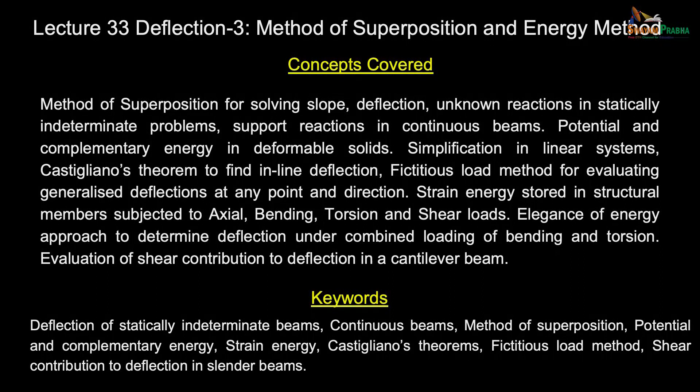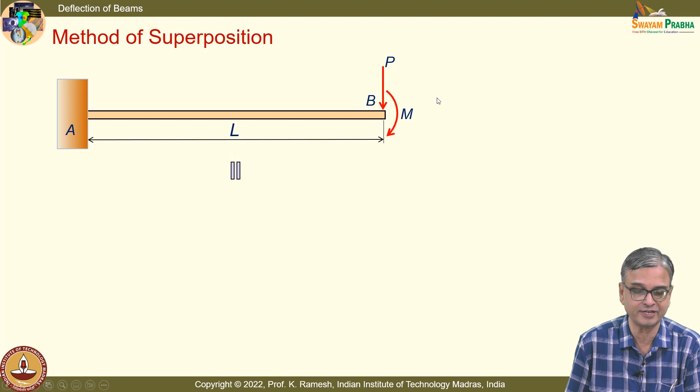Let us continue our discussion on deflection of beams. I will try to cover some problems from method of superposition followed by the energy method. My main focus will be on discussing how to approach the problem. The mathematical simplification, I leave it as an exercise that also helps you to ruminate over what is discussed in the class, and please do the mathematical simplification yourself. In the last class I asked you to do this as a homework, and you know how students operate, so it's better that I discuss it again.

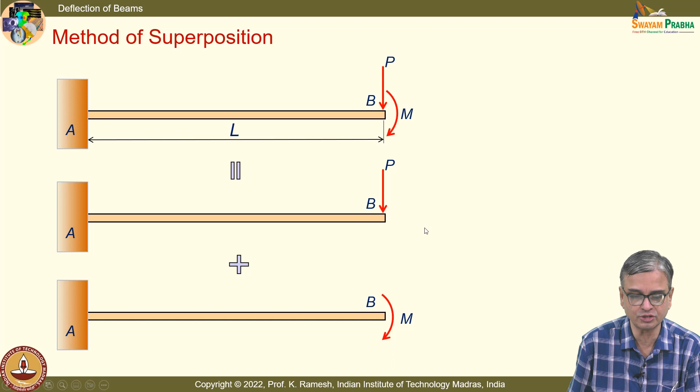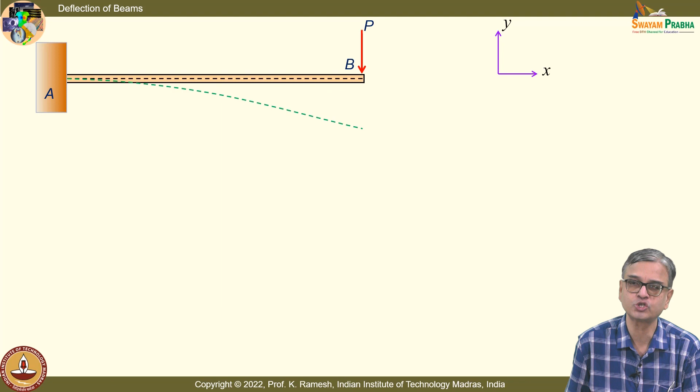We have done by moment area method what is the end deflection and also the slope at the load application point for both these cases, and these two loads are simultaneously applied to the beam, which you can think of as superposition of an end load and a bending moment. And this is a statically determinate problem. Fine. You have individual solutions available and you simply add those solutions, whether it is a displacement or a deflection or a slope. Our focus is to get

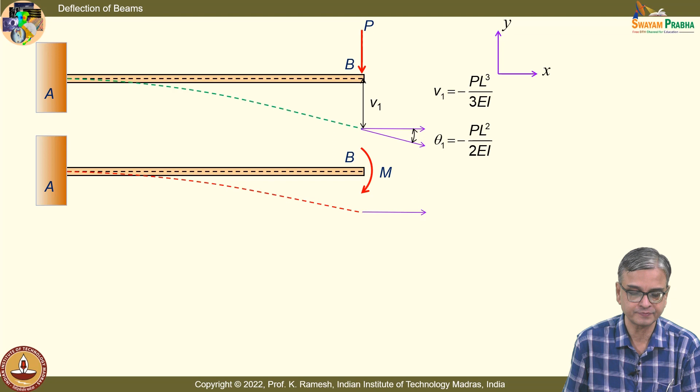what is the combined effect, and we have already derived what is V1. V1 is minus PL cubed by 3EI. I have said that PL cubed by 3EI is a very important result. We may be using it repeatedly. It is worth remembering that. And you have theta 1 as minus PL squared by 2EI. We have also seen for a bending moment what is the value of V2 and theta 2. So, when I have a combined loading, the principle of superposition says I can add them.

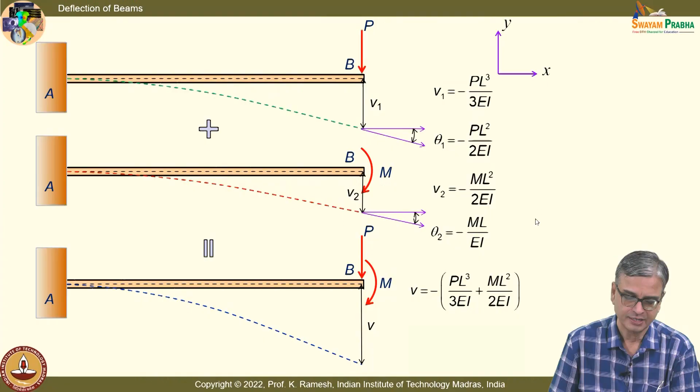For illustration purposes, these deformations or deflections are shown very large. In reality, they are very small and you can comfortably add them, so that I get what is the tip deflection and also the slope at the tip, simply the arithmetic addition of the values that we have got for individual problems. So, V becomes minus of PL cubed by 3EI plus ML squared by 2EI. See, the idea here is, I have also mentioned, assigning the sign to these quantities. You have a procedure where you plot the deflection and then label it. That is the best way to do it. If you do a double integration or integration 4 times, if you follow the sign convention, all the quantities are obtained with the desired sign. In none of the other methods you have that luxury. Okay. Here I have shown this as minus, but you may not get it from the mathematics as such.

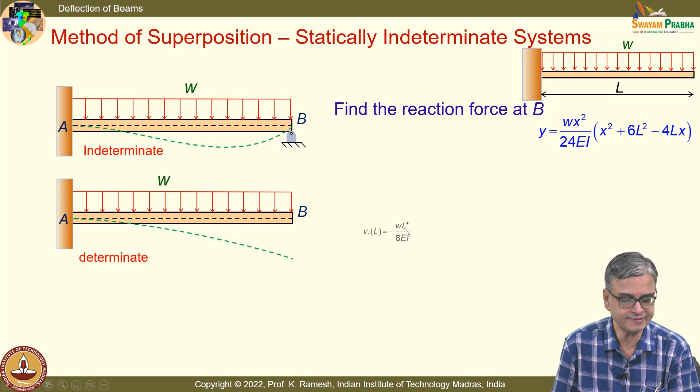People have used y as a symbol or v as a symbol, and instead of phi they use theta, instead of rho they use capital R. So, all of these symbols are seen in the books. So, you should be comfortable by looking at them repeatedly, and you can also sketch what is the deflected pattern when I have a uniformly distributed load. And I can have the second problem. So, from this it is possible for me to find out the deflection. I call this as V1, I get this as minus WL power 4 by 8EI. And here I remove that distributed load, I replace this as a reaction RB, fine. And you know this is nothing but a cantilever, and with this load, what way you anticipate the deflected shape? The deflected shape will be like this. This you should be very comfortable to visualize. Visualization is very important.

So, when I calculate the deflection, I should put the appropriate sign and get the net, fine. But here the question is to find out the reaction RB. So, when I have the reaction RB, I anticipate that there is 0 deflection at this point in the actual beam. So, I equate these two deflections by magnitude, and I can easily calculate the value of the force RB, which you could not have calculated in your rigid body mechanics. Even though it is a statically indeterminate problem, method of superposition helps you to do that.

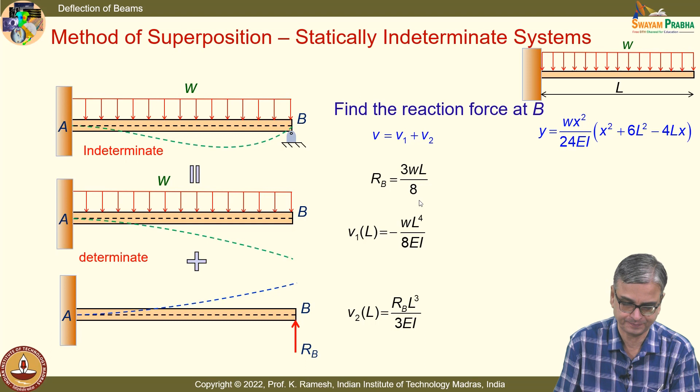I hope I have the value of RB. Yeah, it is V1 plus V2 should go to 0. So, I get RB as 3 WL by 8. So, a very useful application of method of superposition. Then we move on to another problem.

You know, what is this problem? Can you solve it by rigid body mechanics? Is it statically determinate or indeterminate? First, you should recognize that when a problem is posed to you, you should recognize whether it is statically determinate or indeterminate. If I do not have a spring, it is statically determinate. If I have a spring, it is statically indeterminate. It is not possible for you to solve using the principle of statics.

But you know, a spring will deform. So, you can split this as sub problems and also visualize the deformation picture. So, one problem is just look at the end load, other problem is just look at the spring attached. Spring is going to produce a normal force. The question here is, how do you visualize the deflection there? I have said that these 2 points are important. So, I have labeled this as y1 and this as y2.

And I have the second problem where I replace the spring by a force. And which way should I put the force? All that you should apply your mind. Blindly you should not do, you should understand the physics of the problem. When I put the tip load, when the beam is pushed downwards, the spring will try to pull it up. If you do not look at these issues and do not put the problems properly, then you are solving a different problem. So, you should apply your sense of visualization. So, I will put the reaction like this. Can you attempt to draw the deflected pattern for this?

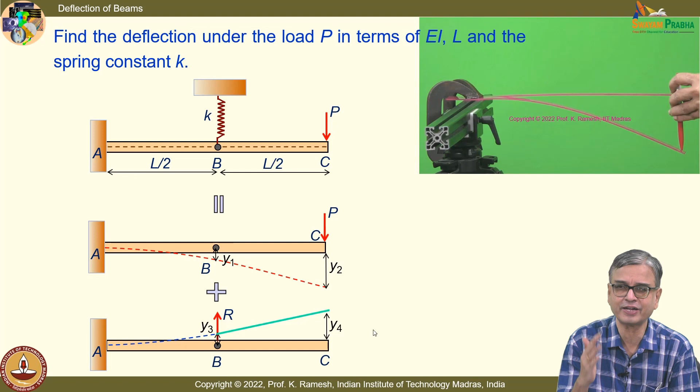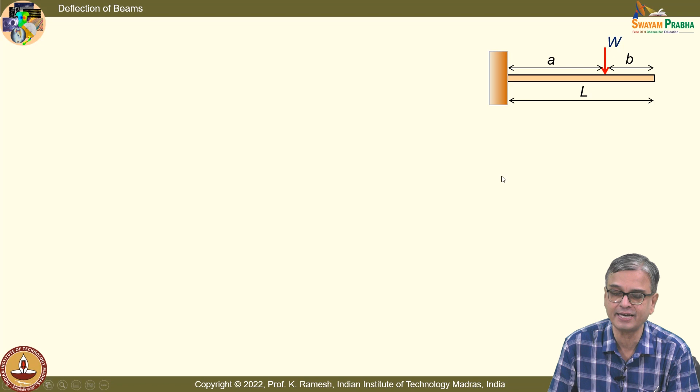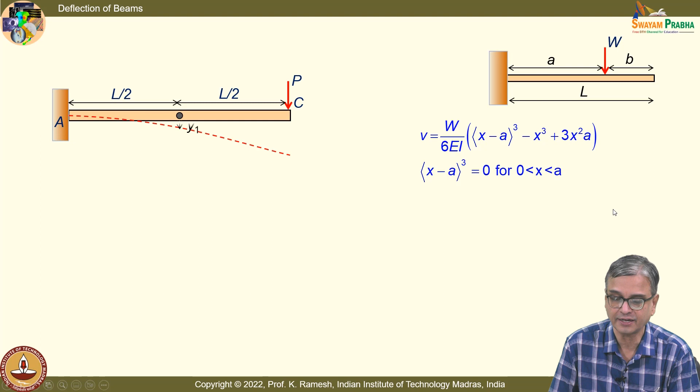And the first issue is, what is the solution that I should look from the table. You have a generic solution available for the cantilever with a tip load, not a tip load, but it is at a distance b from the tip. You have the expression for V, you also have the expression for the theta. I have that, probably it is not coming up. Okay.

I have this as the problem. I have to find out what is y2. Can you tell me what is y2? You do not have to even look up that expression. What is the value of y2? I have a cantilever with a tip load P, that is all. Fine. So, it is a very useful result, PL cubed by 3EI is a very useful result. I have not even put the symbol, sign here. The idea here is, you will have this, and in the diagram it is put where is y2. When I have y2 listed in the diagram, if I give the magnitude, that is also sufficient. I should not make a mix up in my mathematics. Okay.

And at x equal to L by 2, you can substitute here and you can find out what is the value of y1. When I simplify, I will get this. I get this y1 as 5 PL³ by 48 EI.

So, the first exercise is you should look at the table which gives you the generic solution, which one you need to use for this given problem, and learn how to interpret what is stated in the expression, because it says how to handle this bracket. Okay. That is all very simple, you should be alert, that is all.

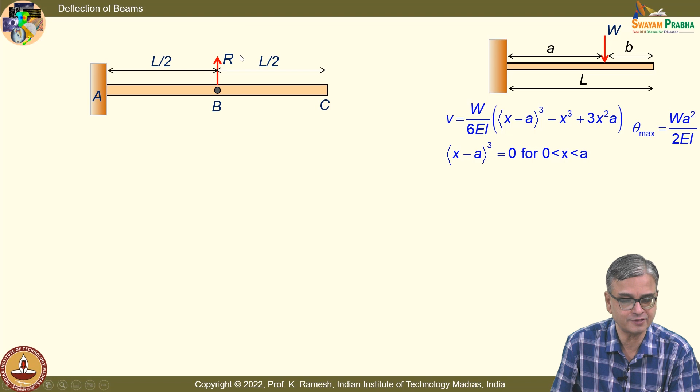So, I have calculated y1 and y2 in a very simplistic manner, and I also need the value of theta, at least the next step we need this, that is given as W a squared by 2 EI. So, you should know how to use this information, that we will see for the spring force. There is a spring force which is acting here, and can you tell me what is the deflection here, y3?

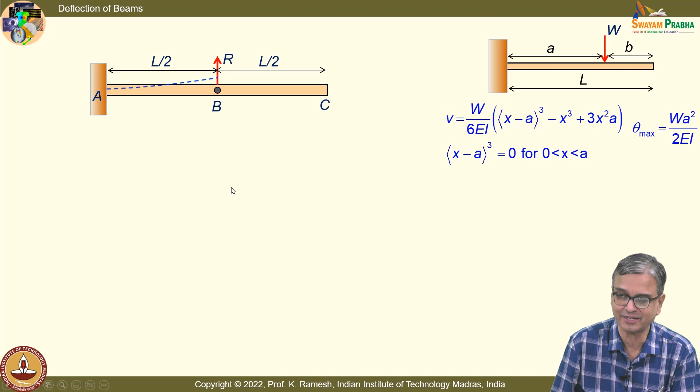You do not have to see anything, RL³ by 3 EI, with RL by 2 cube, okay, that is what you have to do. Yeah, the length is L by 2. So, you have to do RL by 2 whole cube by 3 EI. Certain things, you have to pick up speed. If you are expected to solve as many problems as possible before you come for the examination, you have to remember PL³ by 3 EI, that is a very useful result.

So, I have RL³ by 24 EI, and how do I find out the deflection at C? You need the slope here, and you also need to know the length. Okay. So, this will be addition of y3 plus something. So, I have theta 3 given from this expression W a squared by 2 EI. A here is L by 2. So, R L by 2 whole squared by 2 EI. So, you should know how to handle these equations. So, very simple. It is only high school knowledge that is required, but you have to be alert and careful.

And you have this as a straight line. It is emphasized in the diagram also. So, I have y4 as y3 plus theta 3 into L by 2. See, the theta 3 into L by 2, we are doing it because we are handling very small deformation. That aspect you should remember. So, I get this as RL cube by 24 EI plus R into L by 2 whole squared by 2 EI multiplied by L by 2. So, I get this as 5 R L cube by 48 EI.

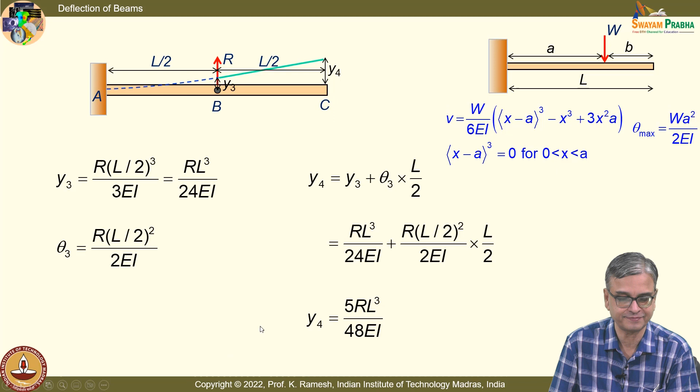Once I determine these deflections, finding out the spring force is doable, and also the end deflection. So, that is what I am going to summarize here. This is looked upon as summation of two problems, one with the end load, another with the spring force. I cautioned that when you look at the spring force, you should put the spring force in the right direction. If you do not put it in the right direction, you are solving a different problem. So, you should physically respond to what is given in the problem statement. So, y3 and y4 are available now. y3 is RL cube by 24 EI, y4 is 5 RL cube by 48 EI.

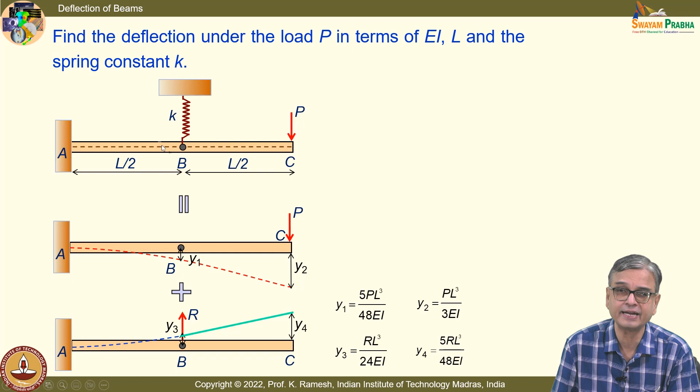And how do I get the spring force? I know y1 and y3. So, your spring force is nothing but k times y1 minus y3. You can do the simplification, and when you do this, the spring force comes to be 5 P by 2 multiplied by 1 plus 24 EI by KL cube. You may also verify my simplification. If there are any typographical errors, please alert me.

And you can also get the deflection at the end. What is the deflection at the end? y2 minus y4. That is all, as simple as that, y2 minus y4. So, you can draw the deflected shape, assign the sign at the end. That is physically appreciating the problem and getting the magnitudes. That is a better way to handle the method of superposition.

And this turns out to be, please verify my simplification, PL cube by 3 EI multiplied by 1 minus 25 divided by 32 multiplied by 24 EI by KL cube plus 1. Okay. So, I expect you to do the arithmetic simplifications. Then we move on to another problem.

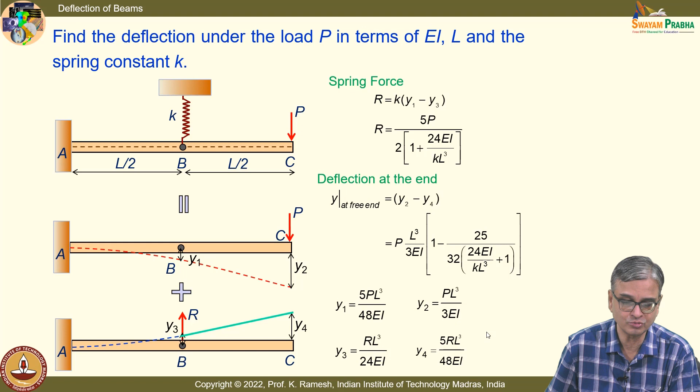What is this beam? I have a support here, here, and here. It is continuously supported, and it is statically indeterminate. I have written it in the title itself, but you should be able to recognize that this is statically indeterminate. And the question is, find the reaction forces at B and C.

And here I said that you should be trained on visualizing the anticipated deflected shape. You know the supports, and I have a distributed load. What do you anticipate as the deflected shape here that you can draw? What is the anticipated shape? It will come down, isn't it? I can draw that.

The idea to remember is, here you will have a slope, because this is not a fixed end. How do you represent a fixed end? The slope has to be 0, and the deflection also has to be 0. So, I can sketch the portion here. Join these two intelligently. Is the idea clear?

See, the main purpose of getting into the principle of superposition is to train you to visualize what happens to the beam even before you start solving it. If you have that anticipation, you can also verify whether you have made any mistakes in your mathematical development. So, the possible deflected shape is this.

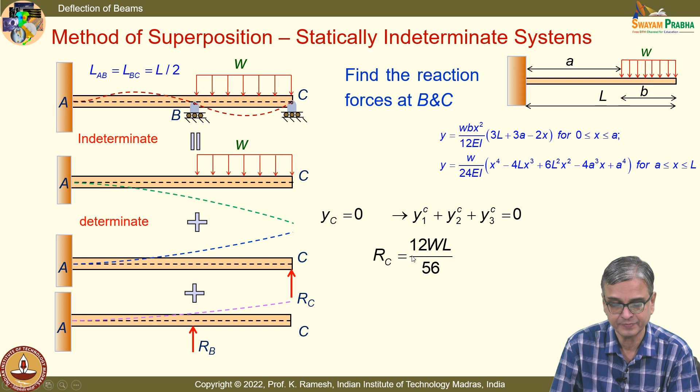So, you know how to get the deflected shapes and also the value of deflection. So, I have y1c plus y2c plus y3c should be 0. That is what happens here. That will help me get RC. I would expect you to simplify and solve it yourself and get RC as 12 WL by 56. Please correct any errors. And YB is 0, that is Y1B plus Y2B plus Y3B. So, RB is 19 WL by 56.

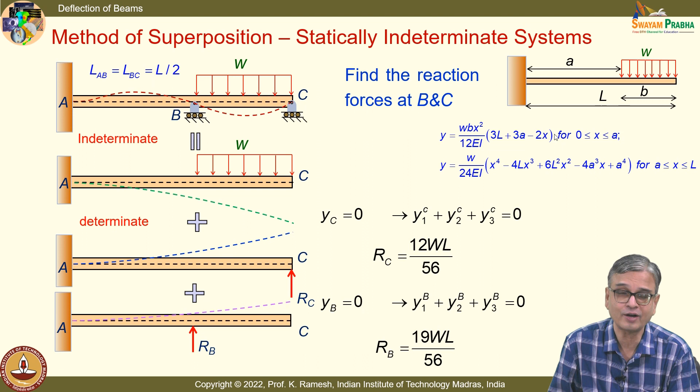So, you have to recognize how many sub-problems you should have for a given loading, and recognize whether it is statically determinate or indeterminate for your understanding, because when you split this, they are all statically determinate problems, and you have from the table what solution you have to call out. That also requires training, and to interpret this, you should see what the definitions given are. So, handle that very carefully. Fine.

One of the most useful methods in engineering science development is handling energies. The moment you come to deformable solids, we say the specimen is going to deform, that means it has the capacity to store energy. And to make our life simple, we say it is a reversible process, it gives out the energy. There are no frictional losses. Even though frictional losses happen in actual systems, you may try to minimize them, and your mathematics becomes much simpler if these are reversible processes.

And for illustration, you take a spring, but you know very well, when I pull a spring, it has a very complex response. We will also solve this problem later, but here what is looked at is an engineering material which deforms similar to a spring. So, I have an axial rod which is pulled out, imagine it like this. And to make our life simple, because we want to develop an equation in a manner that if I differentiate the energy with respect to the force, I get the deflection. That is what we are going to prove.

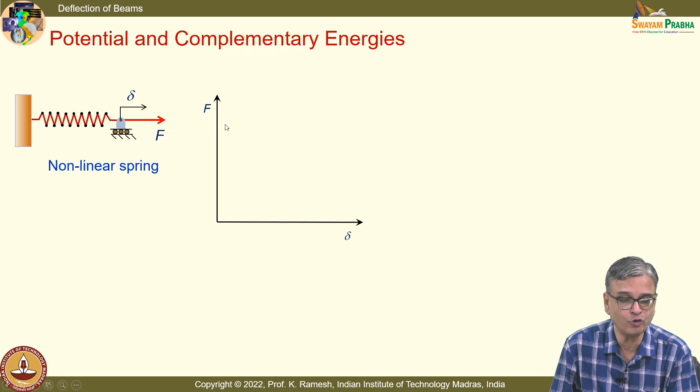We may live on linear systems, but to illustrate the important difference, why I have to work on what is known as complementary energy, we start with a nonlinear spring. What is the implication of a nonlinear spring? When I draw the force deflection relation, it is not going to be a straight line, it will be of some curve. I have the curve like this, it is a nonlinear spring.

And what is the energy stored? In all these problems we have discussed so far, whenever we show a load P, the load P was applied gradually from 0 to P. It is not that you have an impact load of P. We implicitly understood that these loads are gradually applied, and the deflection is seen as the load is increased.

So, the area under the curve is going to give you the energy stored. So, you have the potential energy, I have d delta. I can write this as energy, given the symbol capital U. Do not mix it up with small u. Small u is used for displacement, capital U is used for energy. I have this integrated from 0 to delta, f d delta. That is what you will write here, is it not?

When I do this, I show it pictorially that we are calculating the area under the curve. If I know the force deflection relation, I can evaluate this quantity numerically. But this is not convenient for me to get the deflection. Now, I look not at this energy, but at the energy in this zone, which is labeled as a complementary potential energy, because the spring is non-linear, you will have some other quantity as complementary energy. Is the idea clear?

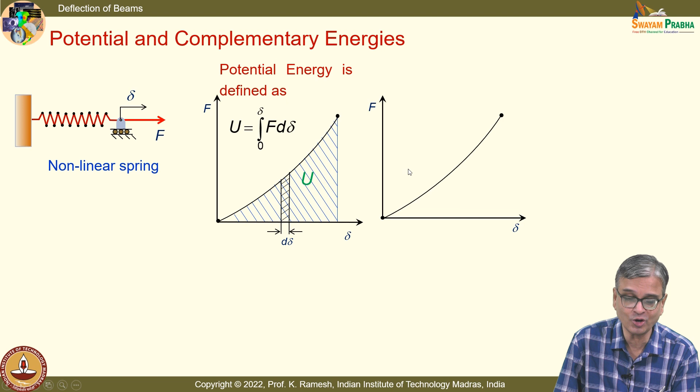The area under this curve and the area under this curve will be distinctly different. They are not the same. Here I have taken a small element and I have written the integral f d delta. If I do the same thing here, what do you anticipate? df will come. That is what we are interested in. When the point of application of a variable force F undergoes a displacement delta, complementary energy, which is always labeled as U star, capital U star, is defined as the integral of delta into df, for the entire load application. If I show this pictorially, I have this as the area, and these two are different.

The complementary potential energy area is different, but this is very nice for me to use. Suppose I differentiate this expression, I differentiate dU star by dF, I will get the deflection. In this chapter, we are finding out the deflection. If I calculate the energy stored in the body and differentiate, when I have a nonlinear system, I should find out the complementary energy. Can you quickly see what is the simplification in linear systems? Think about it, I am going to discuss it. So, this is the complementary energy, and you know for sure U will have some magnitude, U star will have some other magnitude as long as the system is non-linear.

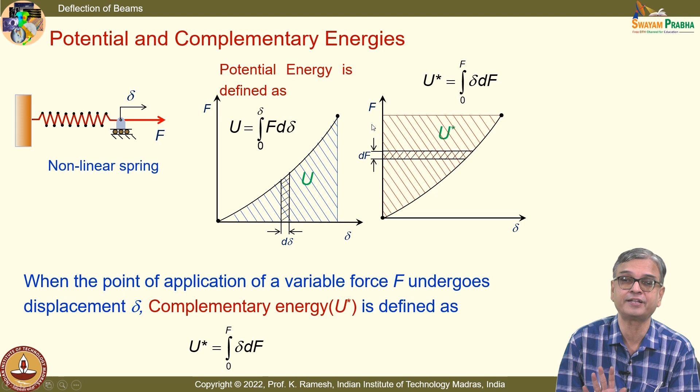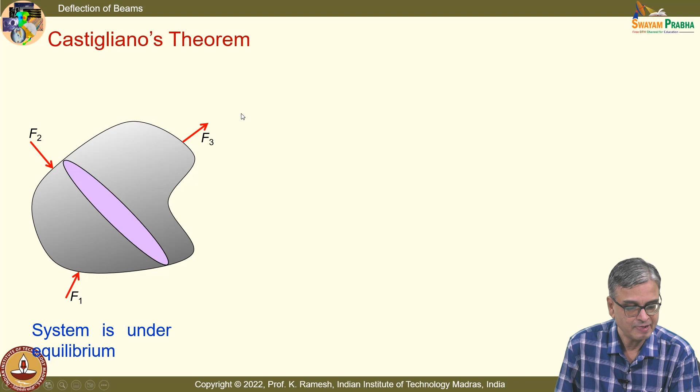Suppose the system is linear, what way will it happen? So, you have Castigliano's theorem. What does the theorem say? For a small increment in the load delta Fi, this is again a very important statement, if the inline displacement, it is also called the work absorbing component, is delta i, then one has

You have to understand, when I have a body like this, it will deform at the point of load application, it can move in a generic path. Which is the one which causes the work or the energy to be stored? Only the work absorbing component, that is the component of displacement in the direction of the force. This is a very important statement on inline displacement. I have the force F3 and it has a deflection in this fashion. This deflection can be resolved into one along the force F3 and one perpendicular to that. What you have as a displacement here is called the inline displacement, labeled as delta i, and this will be labeled as Fi. Only this contributes to energy storage or work done.

And what does this theorem say? This theorem says delta i multiplied by delta Fi equals delta U star, and you can also write this as delta U star divided by delta Fi equals delta i. In the limit delta Fi tends to 0, I can write this as partial U star by partial Fi, and you get the displacement delta i. It is a very powerful theorem which we would keep using even in your higher studies.

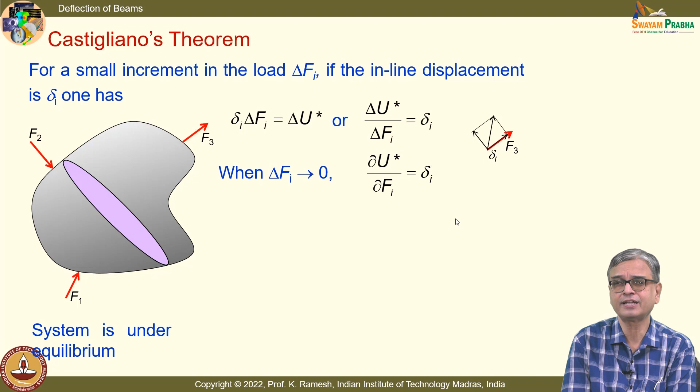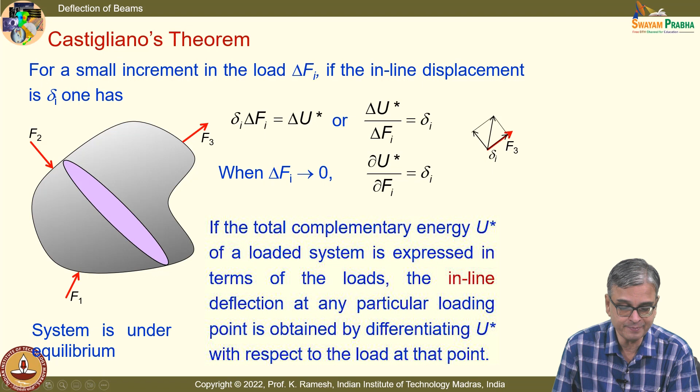If the total complementary energy U star of a loaded system is expressed in terms of the loads, that is the key point. I should express my energy stored in the system as an expression of loads. The inline deflection at any particular loading point is obtained by differentiating U star with respect to the load at that point. So, I have to essentially get a mathematical expression, differentiate it, then substitute the values. That is how you have to solve the problem. When you have the energy method, even if it is given as numbers, you must convert that into symbols, so that you are in a position to differentiate it, and finally put in the numbers. So, what happens in a linear system?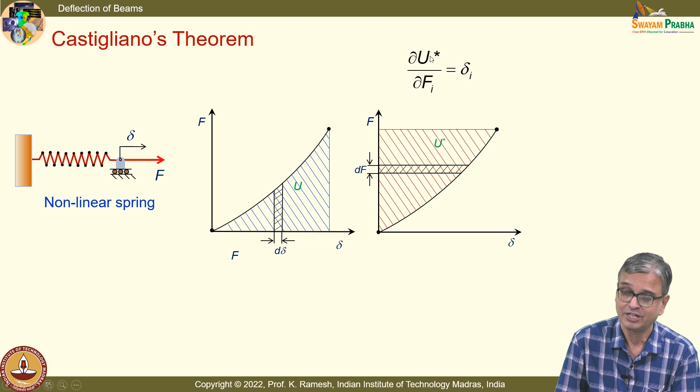Castigliano's theorem, we have developed it deliberately for a nonlinear system. To drive home the point, we need to work with complementary energy. You should never forget that. When I take a linear system, I have a line like this, so automatically these will be of equal areas. So, I have U star equal to delta into dF, that is also equal to F d delta.

So, I can calculate the expression in a very comfortable manner, and for a linear system, what you have as dou U star by dou Fi equal to delta i simply reduces to dou U by dou Fi equal to delta i. It is a very powerful theorem. It looks very simple. It takes a very small time to develop, but its utility is very significant. Very complex problems you can solve.

I have said in our development of moment curvature relation, we ignored the effect of shear, isn't it? And I said that I am going to tell you a method by which you will be able to find out what is the shear contribution to the deflection. We will solve that as a problem. So, many of those seemingly complex problems you can easily handle if you visualize it from the energy point of view, but the development is very simple. Now, what we need to understand is how to calculate the energy.

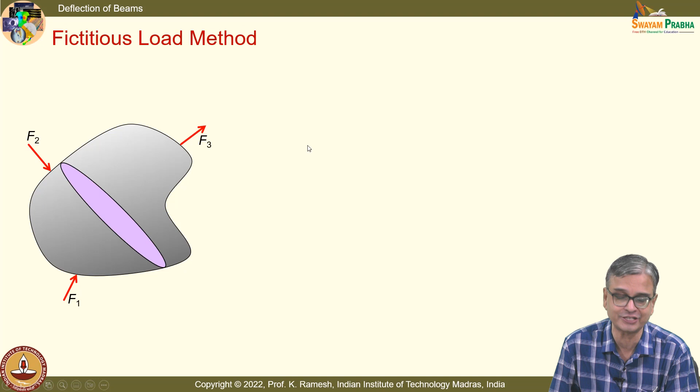But before that, you may not have the luxury that I want to find out the deflection at this point or some other point. I may not have a load there. One of the requirements of this is I should have a load acting at that point, and I should differentiate with respect to that, then I will get the inline displacement. The method itself says, fictitious load method. That means wherever you want to find out the deflection, you introduce a load. If a deflection delta is desired at a point where there is no load or in a direction which is not in line with the load, introduce a load Q and find out the energy because of that Q.

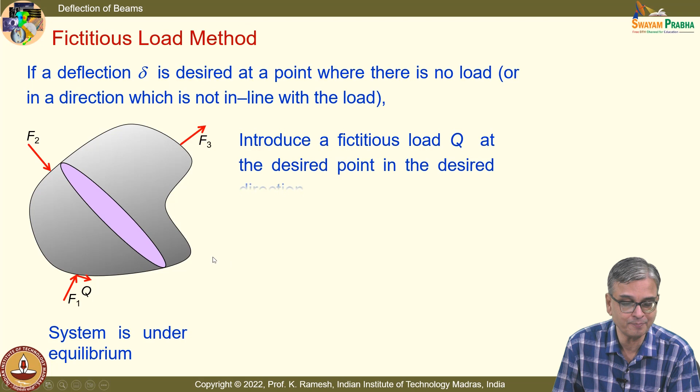It can be a point here, it can be that is not in line with this. I want to find out what is perpendicular to that. Or I can also have another point, introduce a fictitious load Q at the desired point in the desired direction. Express the elastic energy in terms of Fi and Q. Then you have dou U by dou Q. After you differentiate, you make Q equal to 0, you will get delta.

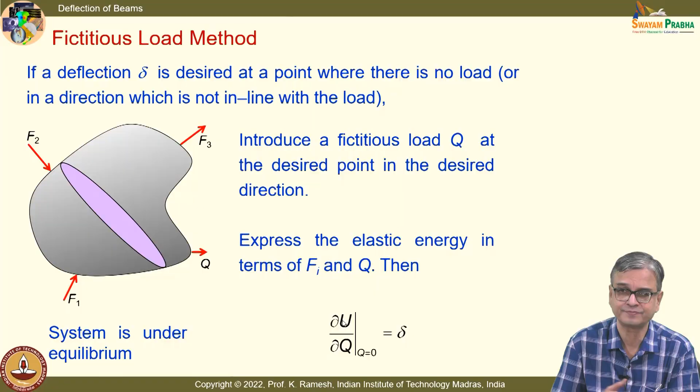This also we will solve. We will try to solve the problem, then you will understand. It is a very powerful technique. In a jiffy you can solve even complex problems. You don't have to do complex integration or anything like that. Very simply you can do that. So, now the focus is how to calculate the energies, strain energy. Okay, we will go and look at that.

Now, here again, though I have shown a spring, imagine that I have a rod made of aluminum or steel which is pulled out, and I have a gradual load application. When I have a gradual load application, it is a triangle. So, I have this as 1/2 of P into delta. Force into displacement is work done. Because the load is applied gradually, I have this as half. So, you should never forget that.

Long time back you have done virtual work, there the physics is different. Here I have this load applied gradually. I have the quantity 1/2 coming into the picture. So, similarly, I can develop the set of equations if I have an axial stress or if I have a shear stress, because we have already discussed what happens when a member is subjected to tension, torsion, or bending. You know what are the stresses developed. Once you know the area, I can convert the stress into force. So, what this expression says is force into displacement multiplied by 1/2. Same thing we will also do it here.

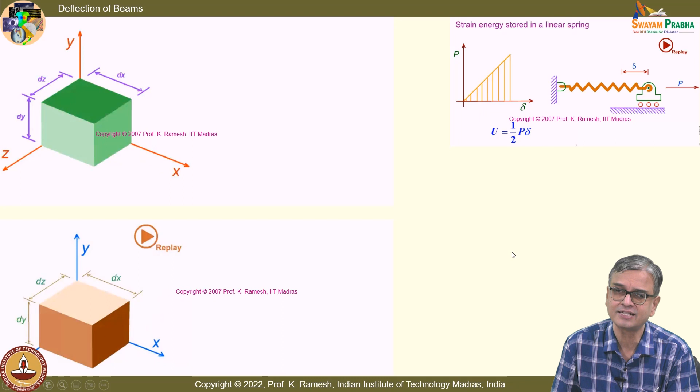So, we will do it for axial stress. I have this as epsilon x, and I have this as force, sigma x dy dz gives me the force, and epsilon x dx gives me the deflection, the elongation, inline displacement, with 1/2. So, when I do this, I get an expression 1/2 of sigma x epsilon x dV. If I go to torsion, find out what is the stress. For torsion, we have to go to shear stress, but if I go to bending, I know the expression for sigma x, I know the expression for epsilon x. So, I can calculate the energy stored because of a bending moment. Is the idea clear? So, now I go to shear stress. When I apply the shear stress, what happens?

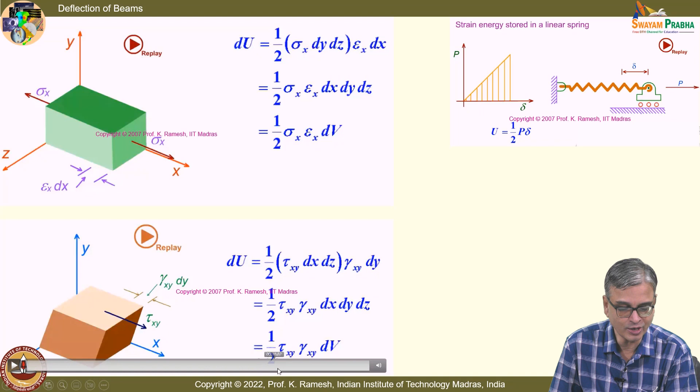Gamma xy is used. Gamma xy is the way the mathematics got developed. Only when the tensorial transformation came, people understood that you should always use 1/2 of gamma xy for transformation. But you write this like this. So, I have the force as tau xy dx dz and the inline displacement as gamma xy dy. So, I get this as 1/2 of tau xy gamma xy dv. So, these are very fundamental expressions.

Now, I will go and see what happens in an axial load, what happens in a torsional load, what happens in a bending load. I have this as P by A sigma x, epsilon x is P by AE. So, when I do this, I get this as 1/2 of P squared by AE into dx, because I can write the volume as dA into dx. So, I have the famous expression U equal to 1/2 of integral 0 to L. You are talking about a slender member, fine, P squared by AE into dx.

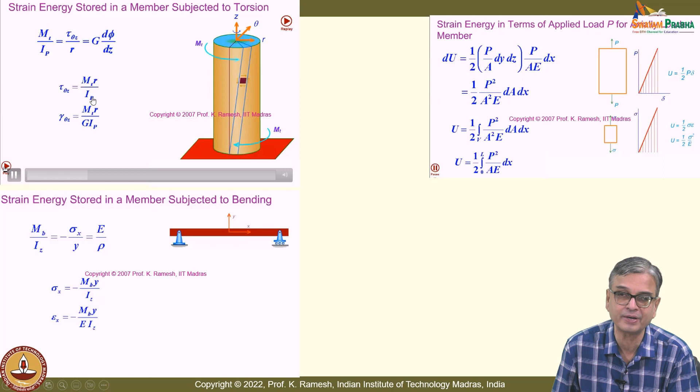Now, let us go to torsion. So, when I go to torsion, I have tau theta z as mT r by IP, gamma theta z is mT r by G IP. We have a recipe how to get the energy when I know the strains and stresses. So, I get the torsional energy as integral 0 to L mT squared by 2 G IP dz. See, look at the similarity between the two. It is very, very similar. The expressions are very similar. It is easy to derive and easy to remember also.

Can you anticipate what way you will get it for bending? It is very similar. It's coming cyclically. So, I have the sigma x and epsilon x, and when I say bending, we are talking about pure bending, away from the load application points. So, I have sigma x and epsilon x. So, I can find out the energy stored, and when you simplify, this also has an identical picture like this. I have this as integral 0 to L mb squared by 2 E IZZ into dx. All these three expressions are very similar.

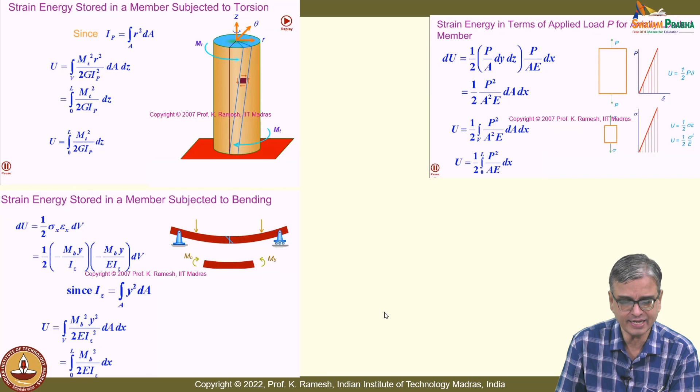You will appreciate the utility when you solve a practical problem. I have a problem where I have a member like this. It's like you are having a hand like this, somebody is putting a load. So you should visualize what happens to your shoulder. Fine. What happens in this section AB? Section AB is subject to what? Section BC is subject to what? Only torsion? AB is subjected to torsion as well as bending, and BC is subjected to only bending, and we ignore the shear deformation. We don't want to complicate now. I will solve shear deformation as a separate problem.

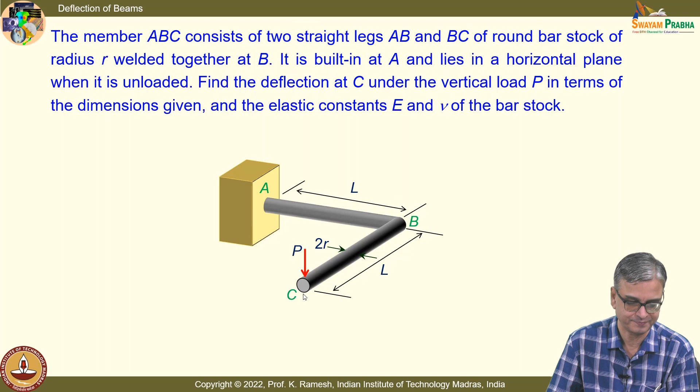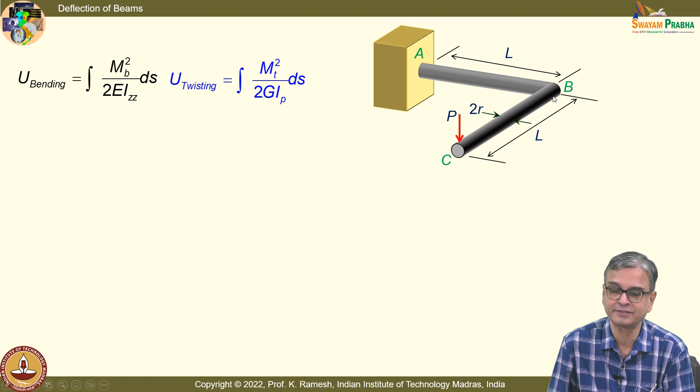So you should recognize that I have to calculate the energies for torsion and bending. So first I start with the expressions for the bending, which we have already developed. Instead of dx, I have put this as ds because I have a member like this. So it represents length along the member, and you can find out the expression for the bending moment as a function. Strain energy due to shear loading is neglected. That is what I said earlier to start with. So in section BC, there is only energy due to bending. So you can write the bending moment is Px. So I had integral of Px squared by 2 E IZZ dx. Even the sign does not matter, because it gets squared. So P squared L cubed by 6 E IZZ is what I get.

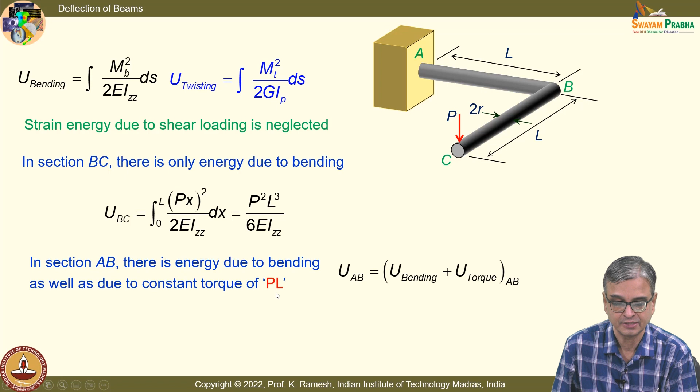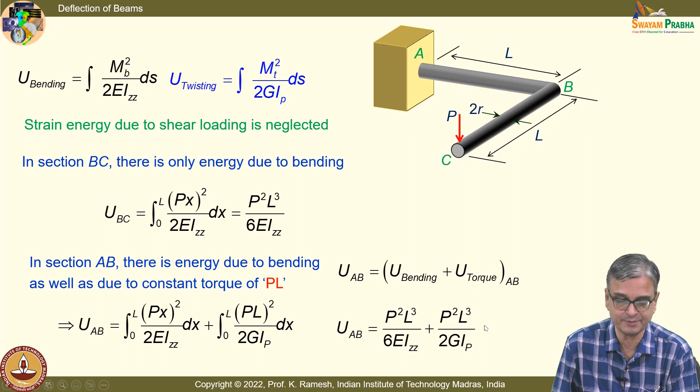In section AB, there is energy due to bending as well as due to constant torque of PL. So UAB will have contribution from bending energy, contribution from torque. So I get this as, for the bending energy I do like this, and for torsional energy I get this PL squared by 2 G IP dx. And you can find out for a circular cross section what is IZZ and IP, and you know the interrelationship. IP is twice IZZ. So you can simplify it like this mathematically, which is done in the next step. Here I have put UAB as P squared L cubed by 6 E IZZ plus P squared L cubed by 2 G IP, and 2 IZZ equal to IP. So you can replace it like this. So I want to find out what is the deflection at the point C. Dou U by dou P equal to PL cubed by EI multiplied by 1 by 3 plus E by 2G plus 1 by 3.

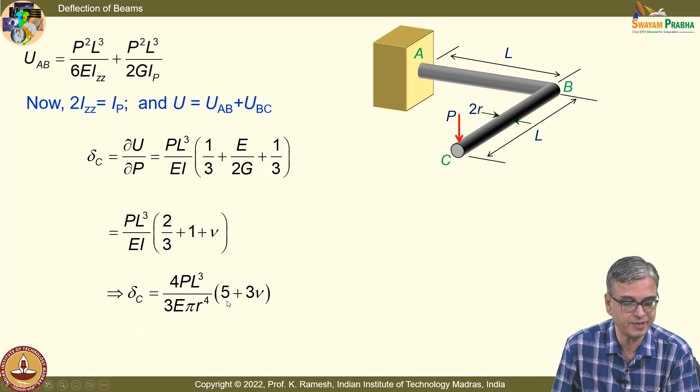So I get this finally as P L cubed by 3 E I, multiplied by 5 plus 3 nu. You try to solve it by other methods, then you will know the advantage and the conceptual appreciation of this. It comes in a very, very elegant manner, okay. Now we move on to

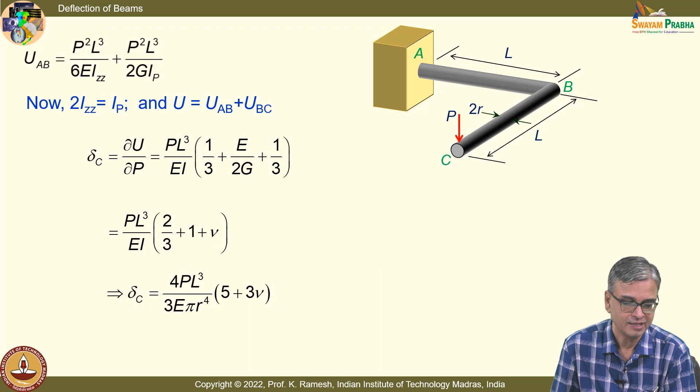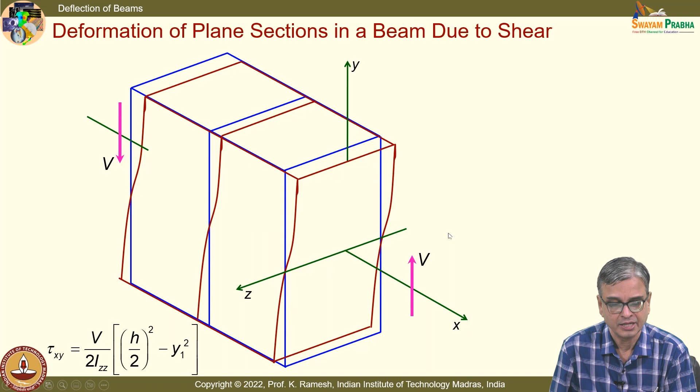understand what happens when you have a shear. It is drawn in a very big picture, wherein you see that I have shear deformation and you have the expression for tau xy, which we have derived, V by 2 Iz multiplied by (h by 2) whole squared minus y1 squared. y1 is some distance, okay. And when you visualize it pictorially, it is like this. You have shear stress variation, it is varying parabolically, and the interest here is what way this alters the deflection.

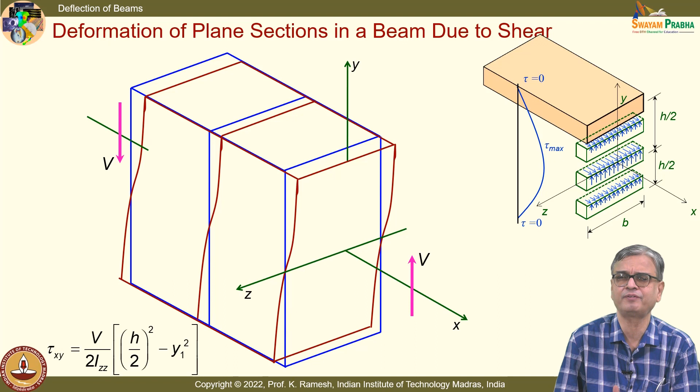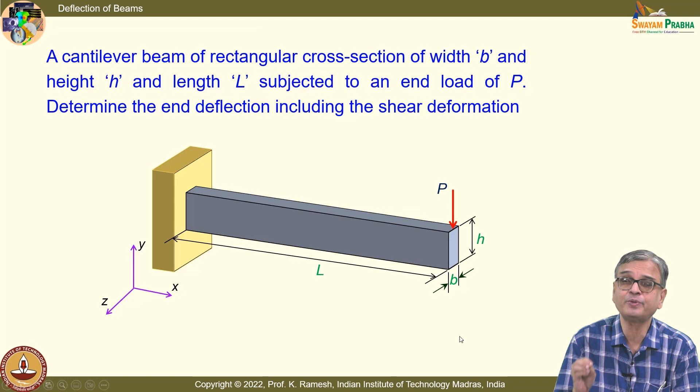We will take a very simple problem, a simple problem of a cantilever, okay. If I articulate the problem differently, you have a very sophisticated instrumentation and find out what is the deflection at this point. It will not equate to P L cubed by 3 E I, whereas all along we have said it is P L cubed by 3 E I. When it is not matching with the experiment, do not blame the experiment. Your equipment is not so old that it is showing a deviation. You can do very careful, very sensitive experimentation. You will find there is a difference, but the difference is very, very small.

Now the idea is, how do I calculate this? With the energy method, you bring in the energy due to shear. That is all you have to do. We have all the necessary expressions, okay. So I have the bending moment and I have the shear stress. I have the expression like this in the context of this problem, which is P by 2 I into (h by 2) whole squared minus y squared. I have written it in a generic fashion.

And U bending is straightforward. It is M squared by 2 E I dx. So, this is what I said, even the sign, if I do not put it properly, in the earlier problem I have not put the sign, it is getting squared. Okay. So, it gets absorbed in your mathematics. I get this as P squared L cubed by 6 E I, that is fine.

Now, I have to write for the shear. Okay. Shear energy is the integral of tau squared by 2G dV, which we will have to look at. We have already derived this expression. Okay. I have this as 1 by 2G. You have to interpret this mathematics properly. See, I have h. I can see this as minus h by 2 to plus h by 2, and I can also visualize that I have a small dy, because the shear stress varies as a function of the distance from the neutral axis. For this entire length, I can have L into B into dy as your volume. Okay. And that I integrate from minus h by 2 to plus h by 2. So, I would expect you to do this mathematics. I am going to show what is the result that I am getting.

Still I have not got the deflection. Deflection is nothing but dou U by dou P, and the energy is bending plus shear. Okay. So, I will take the bending plus shear and differentiate it with respect to P. U is given. So, when I differentiate it with respect to P, I get this as P L cubed by 3 E I plus 6 P L by 5 A G. That is the deviation from your P L cubed by 3 E I. So, you can substitute for a given problem, whatever we have solved earlier, or you give a fictitious distance of L, and you will find this contribution extremely small.

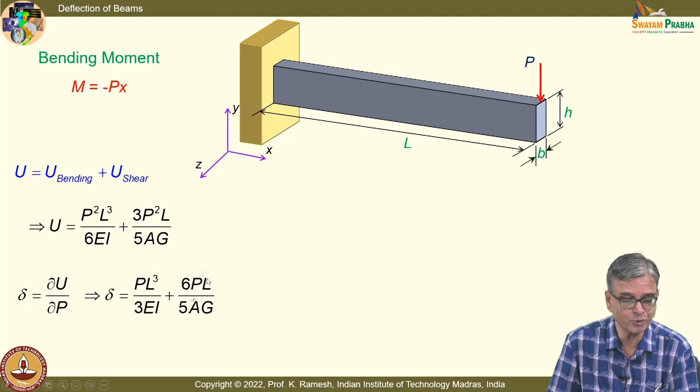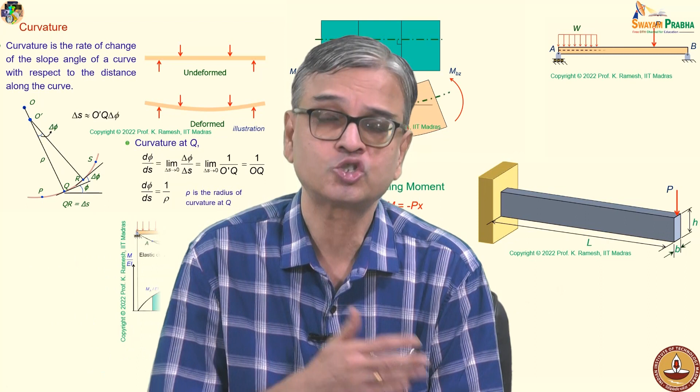So, in this class, we solved a variety of problems by the method of superposition, and we have also looked at Castigliano's theorem and solving the deflection by the energy approach. And the energy approach is interesting, and many numerical methods are based on energy, and it is very useful from a mathematical standpoint.